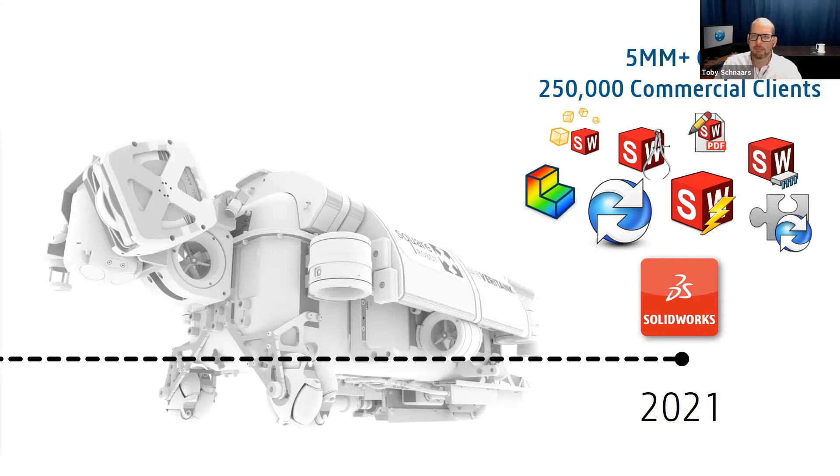But it turns out that SolidWorks is actually just one brand of many very strong brands available from Dassault Systèmes. Some of these other brands you may have heard of, things like CATIA, things like SIMULIA or ENOVIA. These are all different brands owned by Dassault Systèmes that are incredibly strong, have amazing teams of developers behind them, and have developed mature products available. But SolidWorks wasn't really touching any of these solutions - it was kind of in its own little world, not branching out and not taking advantage of these other solutions. And so to bring all these solutions together, the 3DEXPERIENCE was created.

3D experience is really a platform, an idea if you will, that becomes a very specific and useful tool when you and your team purchase it and start using it. But the idea is really to leverage technology and resources from all the brands that Dassault has access to, bringing them all together in one single interface. And that interface is known as the 3DEXPERIENCE platform.

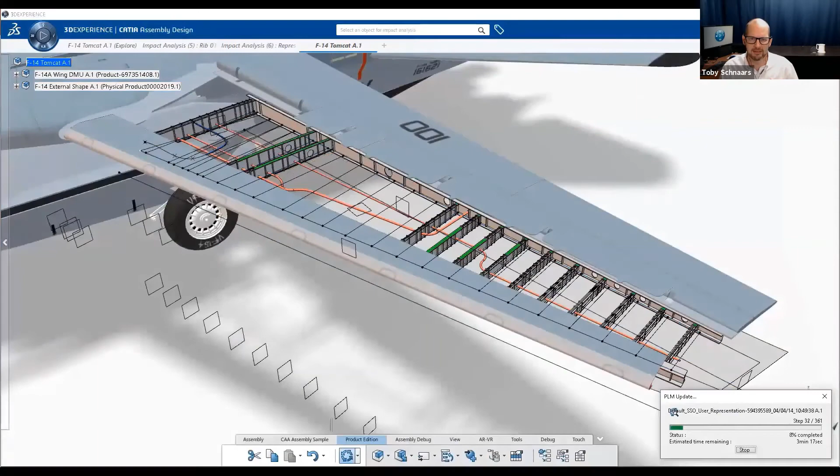So for example, CATIA - high-end 3D CAD modeling, super extensive libraries, super capable tools. CATIA in combination with Centric PLM would maybe let you do something like this: design an entire airplane, every single component on the airplane, design the fluid lines for the wings, design the electrical systems, all in one assembly, all in one environment. That's really leveraging the power of CATIA inside of a 3D experience environment.

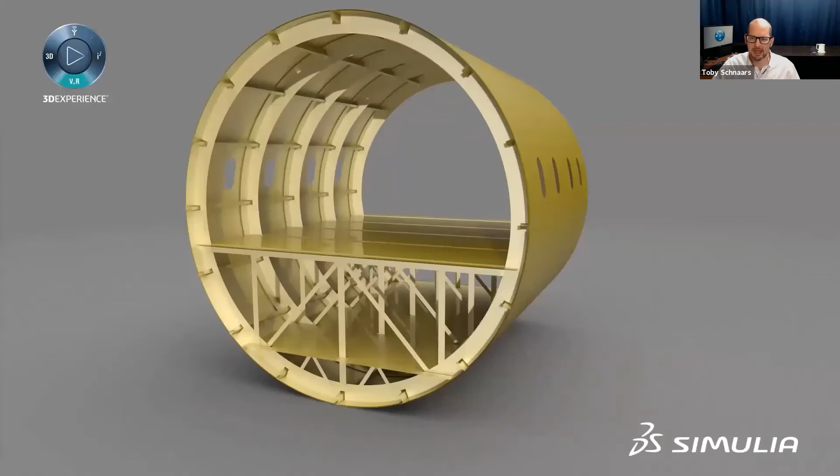Or maybe my favorite product, SolidWorks. What if we wanted to take SolidWorks and do some crazy nonlinear analysis on a SolidWorks assembly? Well, we could do that by taking the SolidWorks models and loading them into the incredibly capable SIMULIA tools, generating a study like this, a nonlinear study, where we could really see what's happening throughout the entire fuselage. This is an example of taking models that you've created in SolidWorks and then leveraging the 3D experience to get additional capabilities that you wouldn't find in SolidWorks or even inside SolidWorks Simulation Premium.

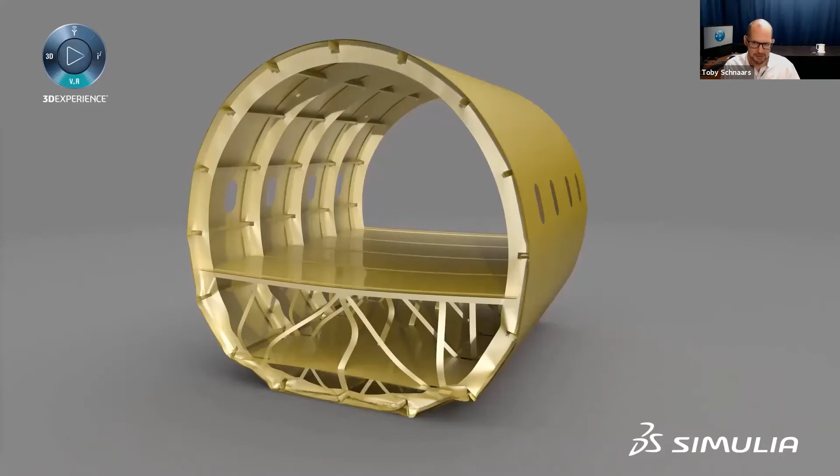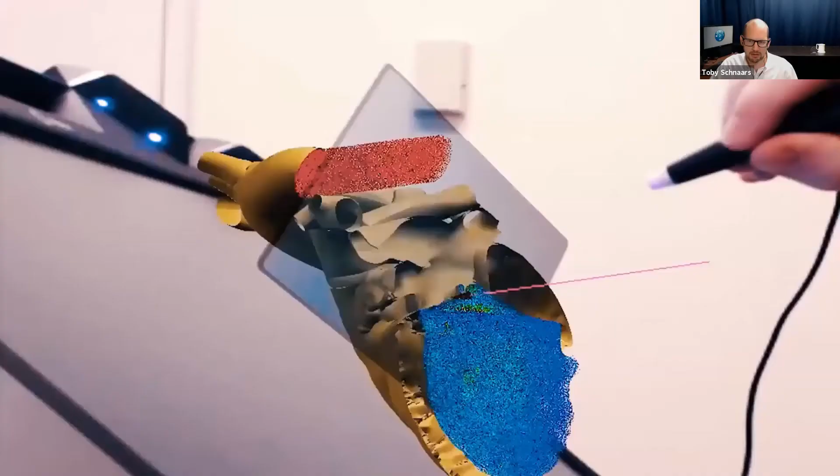Or maybe even something like a human organ, being able to hold a human heart in your hand and move it around and take a section view through it and see what's going on with the fluid flow inside of a human heart. These are tools and capabilities that are absolutely within our grasp.

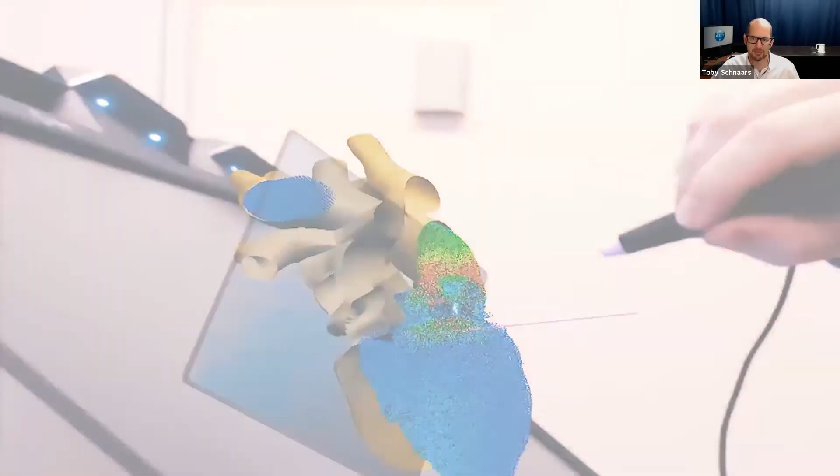We have these tools in other areas of the company. Why not bring them all together and put them into one single system that everyone can utilize? That's really the idea behind 3DEXPERIENCE. It's just that idea of creating a portal that the entire team can log into and leverage, utilizing technologies from different areas of Dassault.

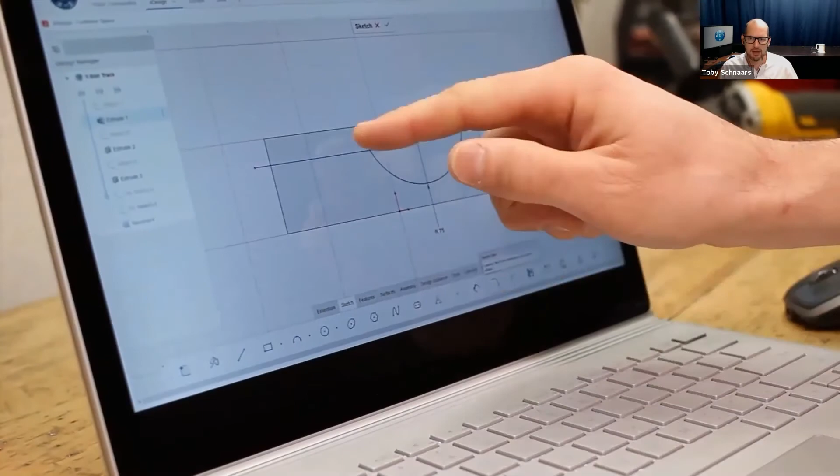One of the things I've always loved about Dassault is the 3D modeling we find in SolidWorks. We're seeing some of these modeling capabilities being moved over to 3DEXPERIENCE in the form of a true browser-based 3D CAD system. So here you can see I'm at my workbench, working on a touch screen computer, and I'm able to create sketch geometry and solid geometry. But this isn't a program I installed on my computer. This is actually all being done within a web browser.

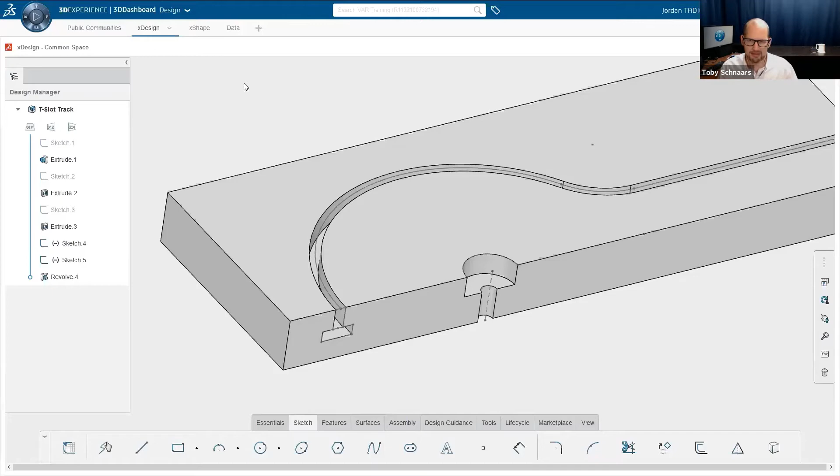So I don't have to install any software. And more importantly, because it's in the web browser, I could jump off of this computer, go upstairs, jump onto my tablet, and pick up right where I left off. All the heavy lifting is being done in the cloud, and very little is being done by that local device.

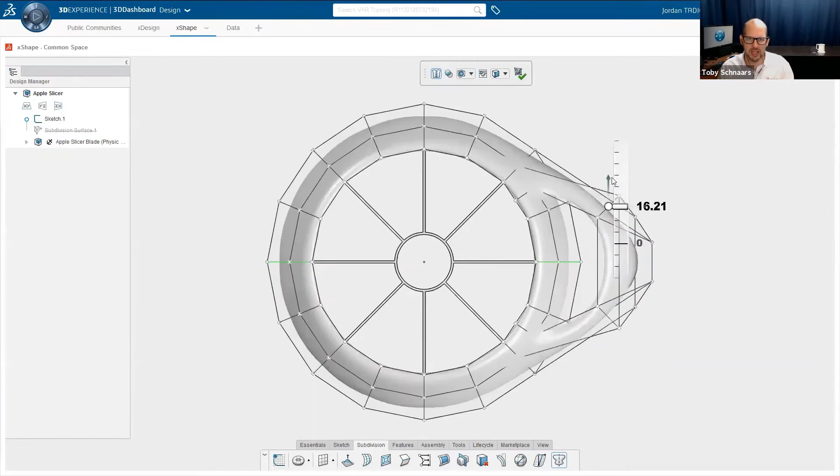And this capability doesn't only apply to what you'd traditionally find in mechanical engineering, machined parts, but it's also something we can do in a web browser on swoopy, lofty parts. This is a different browser-based tool called X-Shape. What X-Shape lets you do is create plastic, swoopy, lofty commercial products in just a few clicks. You saw that entire shape.

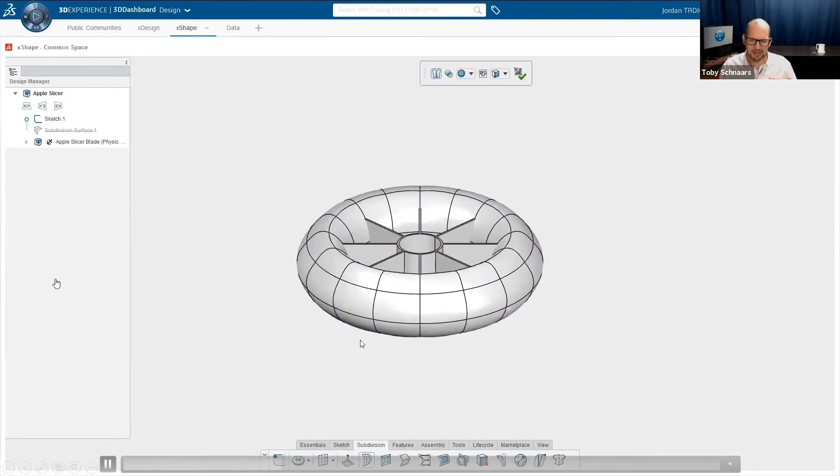It happened so fast, I could start it over and show you again. It started as a donut. Instead of starting with a sketch and revolving it, you just drop a donut out there. You're able to resize that donut, grab different nodes, push and pull, and ultimately create this shape.

Now, creating something like this in SolidWorks and ensuring you're maintaining continuity between the different faces, curvature continuity between the faces, would take hours and hours, maybe even days to come up with the final solution. But by leveraging 3DEXPERIENCE, we're able to utilize tools we never had access to, and create this geometry in just a matter of minutes.

And then maybe you could share that with the team, get some feedback, make a 3D print. You could then decide you want to make version 2, version 3, version 4, and finally come up with version 5, which is the final version.

Now, what do you do with it after you're done with version 5? Well, using our interconnectivity tools, you can just push that model right into SolidWorks. In fact, you could even export from X-Shape as a neutral file format, like a 3DXML or a STEP file. You could export right out of X-Shape, and then open that in SolidWorks.

And you could begin creating your parting lines, begin shelling, adding ribs, adding any internal components, and getting that design ready for manufacturing. Maybe have the whole thing, 5 different permutations, 3D CAD model created, manufacturing model created out of SolidWorks, top half, bottom half, parting lines created, mold design created in a day, instead of maybe taking weeks to go back and forth with the rest of the team and make those changes.

So that's really when you're looking for the benefit of 3DEXPERIENCE: it's that streamlined communication combined with tools we've never had access to, allowing you and your team to get your products from drawing board out the door and into market that much faster. That's really the core benefit we're all trying to achieve.

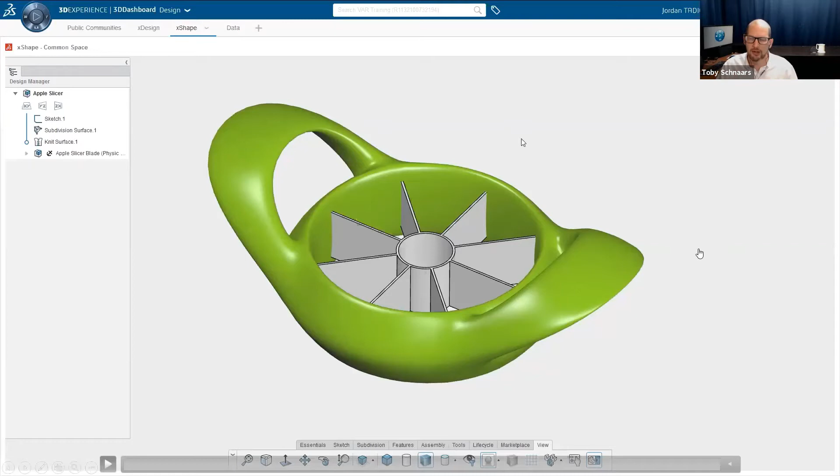Now, this tool, just like the previous tool I showed you called XDesign, runs entirely in a browser. This one is called X-Shape. It means you can jump from one device to another, log out of one session and log into another, and just pick up right where you left off. That's another huge benefit of this being browser-based technology.

Here we can see what that browser-based interface looks like. In this case, I can have files stored on the left in a file repository, like the Apple Slicer. This could be a file repository the entire team can access, and I can take those files and drag and drop them into the layout on the right, which is a 3D model viewer.

We can see that when we do that, anyone on the team who's been granted access can view the files in 3D. This means they can take measurements, make exploded views, and they don't have to have any special software loaded. This is all inside the browser.

So you could do this from the road, from your mobile device, your phone, a tablet, whatever it is, and provide feedback to the rest of the team. Imagine how beneficial it'll be when the project manager can look at a 3D CAD model, discover something wrong, and convey that back to the engineer all from the road—maybe some found time while in transit, maybe on an airplane.

But the tools available in 3DEXPERIENCE are not limited to CAD and engineering, and this is where we really start to shine when it comes to the differences between the SolidWorks solutions and what we offer in 3DEXPERIENCE. In fact, you could get a lot of benefit out of 3DEXPERIENCE without ever even touching the 3D modeling tools.

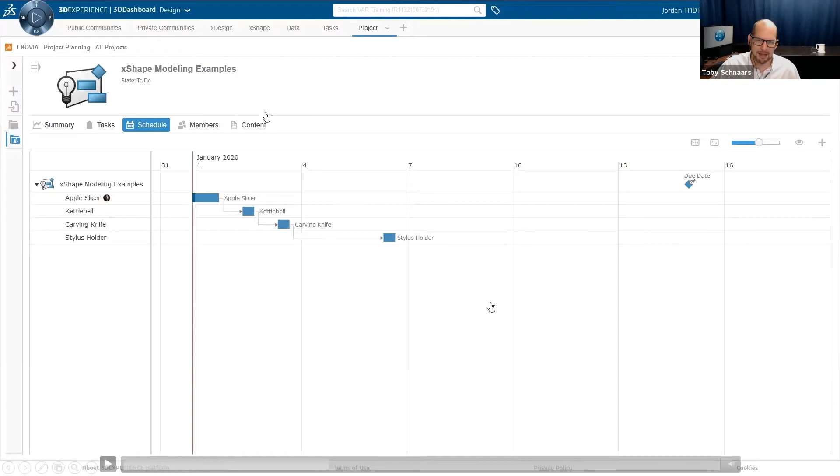So as we make adjustments, we can see that dependency caused the timeline to move forward a little bit. But it's not far enough that we're going to be beyond the due date, so we should be okay.

Now, of course, the items on this Gantt chart are linked to specific tasks we can assign to our team members. Each team member can be presented with a to-do, in-progress, and done task management suite, so that everyone on the team at any point can check in and see how people are doing.

Imagine if you were the project manager wanting to figure out whether your employee was done with that Apple Slicer. Just by logging into the collaborative tasks, you can see an overview of which tasks are open and which are done. This can be presented in a variety of ways, including charts and graphs—so if you prefer a pie chart showing how many tasks on your team are open, in progress, or done, you can absolutely do that in 3DEXPERIENCE.

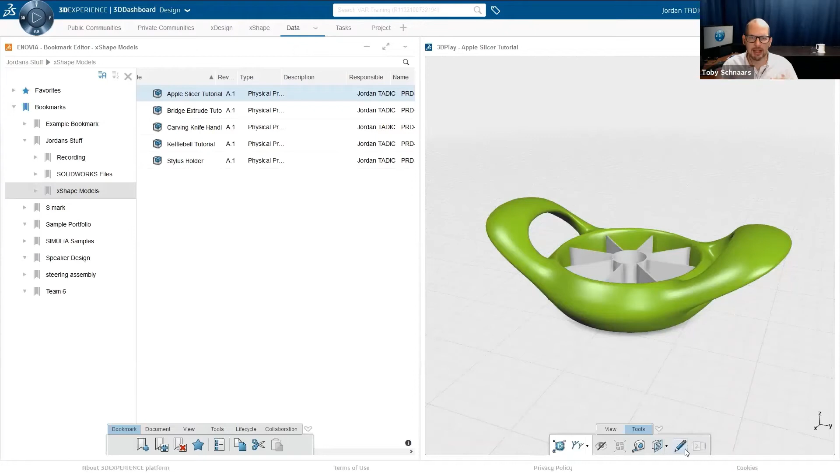Along the way, we're going to be able to tap into things like notifications. So when that task does move to done, the project manager, the coworkers, the other people on the team are going to get notifications. Nobody has to wait for somebody to send an email or say, hey, I'm done with that, you can take it next. You're just automatically going to get notifications when it's your turn to jump into the project.

I mentioned before that we can utilize this 3D viewer and anyone on the team can view it and provide feedback. Well, the easiest way to do that is just to create a markup and then share that markup with the rest of the team.

Now, one thing we like to do in 3DEXPERIENCE is ditch the idea of email, and instead we prefer to communicate on a message board. So you get the entire team that's involved with this project, or the entire team that does electrical work, or the entire team that really forms a community. It's up to you to decide what dictates or defines that community. But you get those people who all belong to the same community, who all have the same interest or the same goal, and you bring them together into one of these message boards.

That way you start to get away from the whole reply-all chain. You send an email to somebody, they reply to you and somebody else, now you're going to reply all to them. And before you know it, you've got 50 emails that have nothing to do with you. Instead, what you're able to do is post something on a message board and read the comments that pertain to that particular post. So you can right away see everyone who's got some input, some collaboration for that phase of the project.

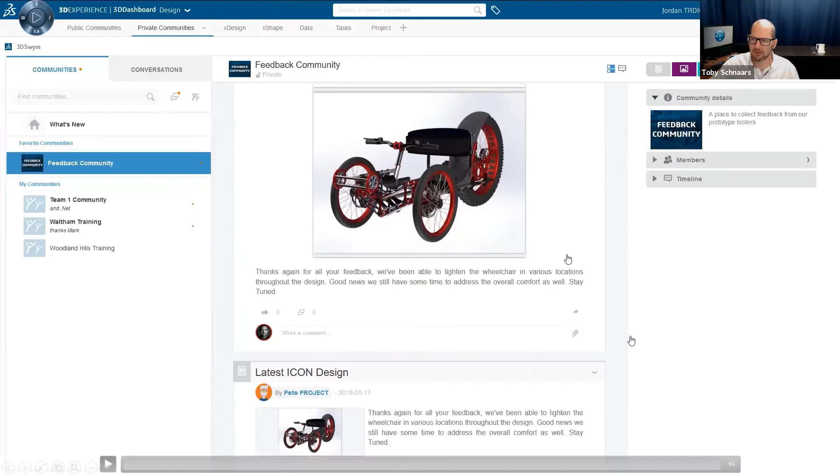So we can see that 3DEXPERIENCE lets us work with our 3D models, lets us create a 3D model and view it in a 3D viewer, lets everyone on the team have access to those tools. And I don't think it can be stated enough that those tools are going to be available from your laptop, but they're also going to be available from a mobile device like a tablet or even your mobile phone. That's just going to further streamline the process of getting the answers and the information you need and directing the project.

As far as the tangible benefits, what I would say is that 3DEXPERIENCE is cloud enabled, which means you're going to have lighter hardware and a more simplified deployment. So cloud enabled means that everything being taken care of is taken care of up in the cloud. It's web authenticated. You don't have to worry about setting up those servers or anything like that.

The lighter hardware means not only for the server side, but also for the end user side, you're able to do your 3D CAD in the browser. There's no special workstation that's required. You're just doing all that CAD in the browser, and then you're leveraging the cloud to do the computing.

As far as simplified deploy goes, when a new update comes out, if you do happen to have any plugins for your local software, like for Solidworks, it's a one-click update. Otherwise, you just log out one day, log in the next day, and the updates have been pushed. Right away, you're ready to start using the latest and greatest functionality in 3DEXPERIENCE.

So what is 3DEXPERIENCE? It's a way of taking all of this technology, all of these resources from throughout Dassault, and combining it together into one single environment that you and your entire team can log into to leverage, to do product development, to do sales development, whatever your task is at your company. There's going to be tools inside of 3DEXPERIENCE that are going to help you. And the benefit is that this puts everybody on the team in one single environment, so now you're able to leverage data from other departments.

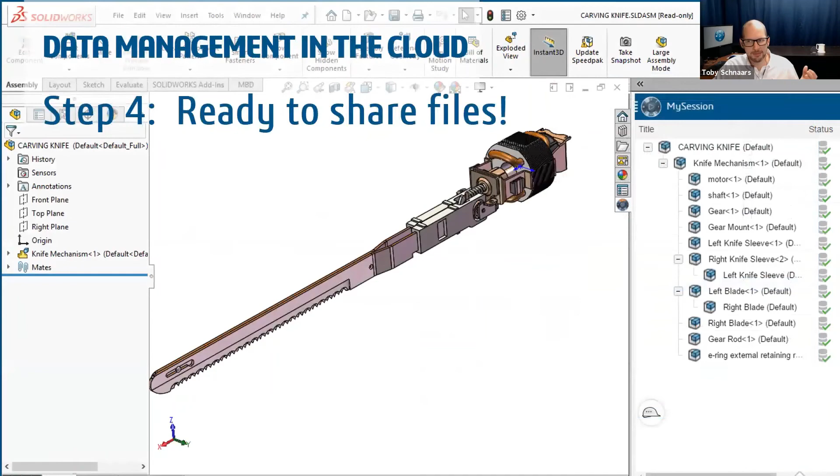You're going to find that your engineers in Pennsylvania are going to be able to share their files with the engineers in Ohio, who will be able to share their files with the engineers in California and all throughout the country, or even all throughout the world. Now, the thing that I think really makes this solution appealing, especially to your engineers, is that it all works right within SolidWorks. So when you propose this to your engineering team, you're not going to be showing them some brand new tool that they've never seen before.

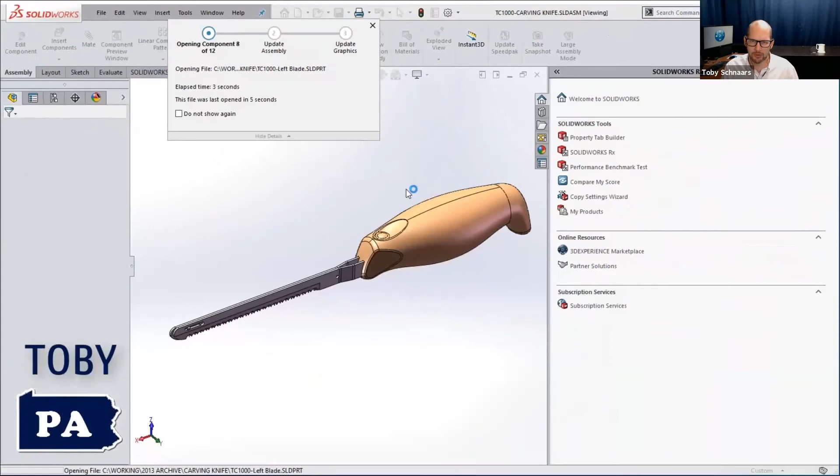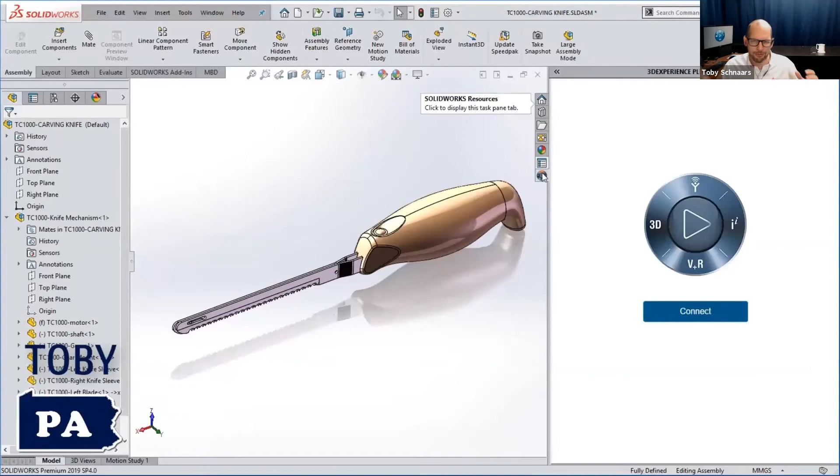If you wanted to get started taking files and adding them to the file repository, the first thing you would do is you would just go to open files the way that you've always done. So here we are inside of SolidWorks using the files that we're already used to, the tools we're already used to, and we're just going to turn on an add-in inside of SolidWorks, which means that we're never going to leave this environment. We're going to maintain that continuity with our old friend SolidWorks that we're used to. We're not going to be throwing anything new at the engineers that will throw them off, and it's going to make it very easy for them to adapt to and adopt this new solution.

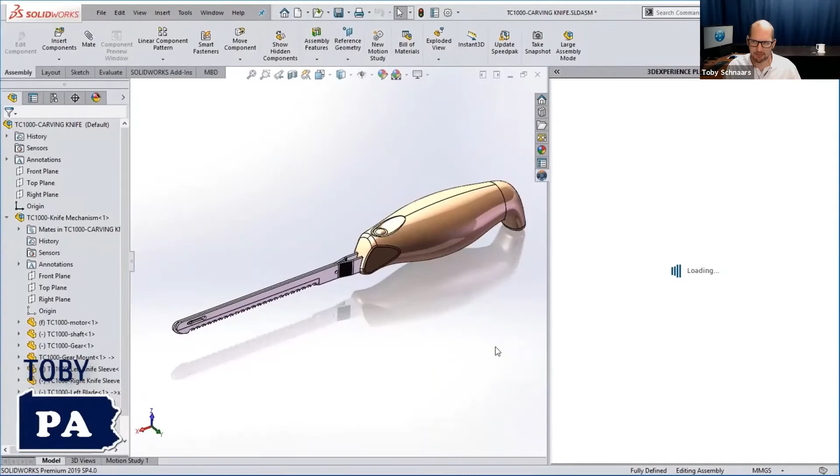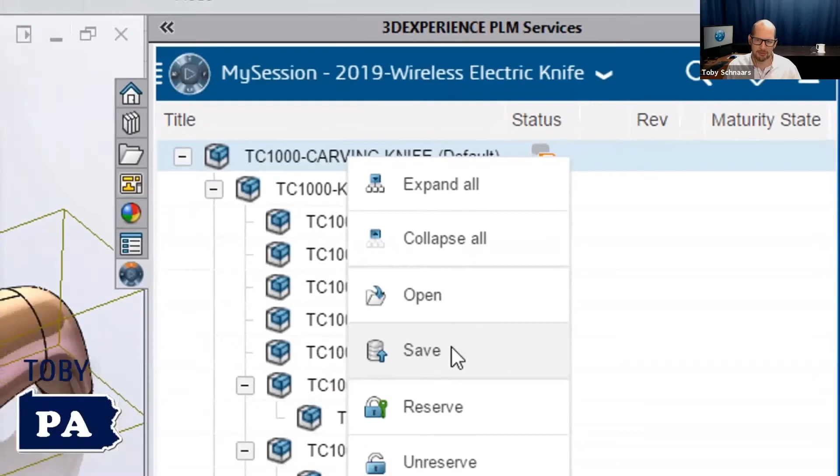Once those engineers get in and they're ready to add files to this repository, all they really need to do is a right mouse button and a save. That's what we're showing here. The assembly is open, and the task pane is over on the right in SolidWorks, which the engineers are already used to seeing. All they need to do is go into that task pane and do a right mouse button on that file and choose save. And because 3DEXPERIENCE understands the interrelationship between SolidWorks files, it's going to scoop up all of the parts, all of the sub-assemblies, and add them into that central file repository.

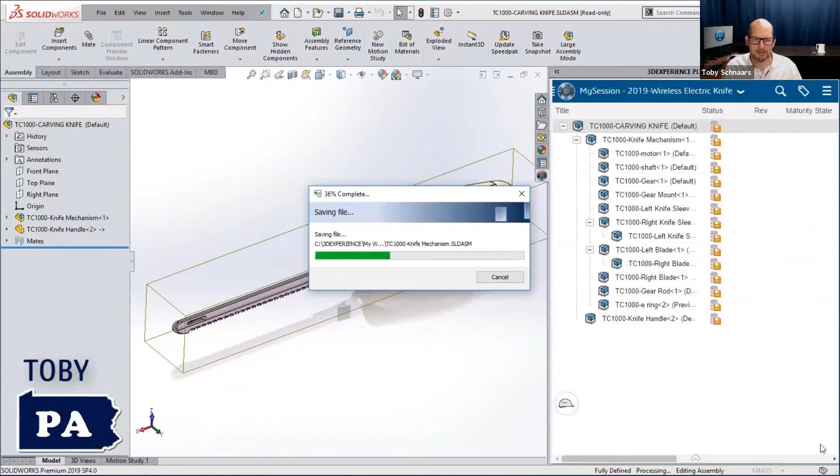Ultimately what this means is that everyone on your team is now going to be able to access these files. Maybe another engineer is going to need to take these files and make more changes in SolidWorks, but maybe it's just a project manager, or maybe even somebody in purchasing who wants to look through the assembly structure and use the information from that assembly structure to order some of the off-the-shelf parts. This is the benefit of 3DEXPERIENCE: everybody's able to access this data from one single location. Everybody goes to the same spot. Everybody logs in the same way.

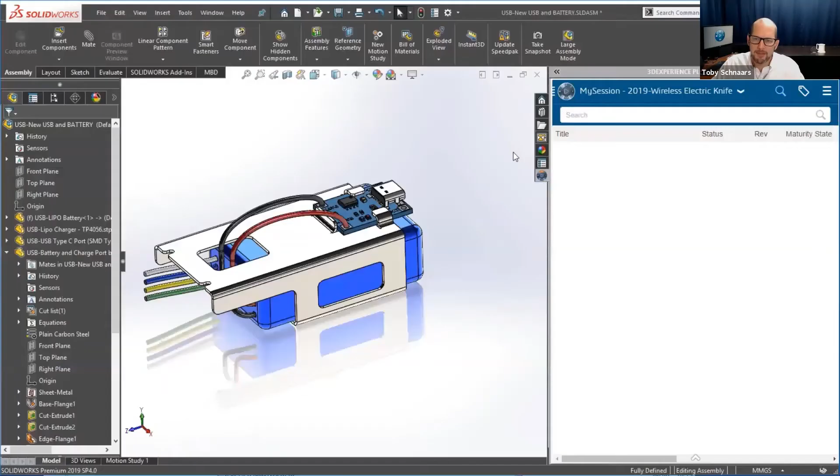So I hope that helps to illustrate this idea of data management in the cloud. We've seen a lot of customers all throughout North America, all throughout the world really, who have adopted this solution and have been really happy with it. It's a great way to get your team up and running, especially if currently your team doesn't have any data management as part of the solution for SolidWorks.

This is just a great way to get them up and running, get them sharing files, and give them new tools they didn't have before, like the ability to create revision A, revision B, revision C, and at any point substitute one in for the other. This gives them the ability to have the team in Pennsylvania working on one end of the assembly, the team in Ohio simultaneously working on another end of the assembly, and then both teams just choosing an update button and updating all the files to the latest build.

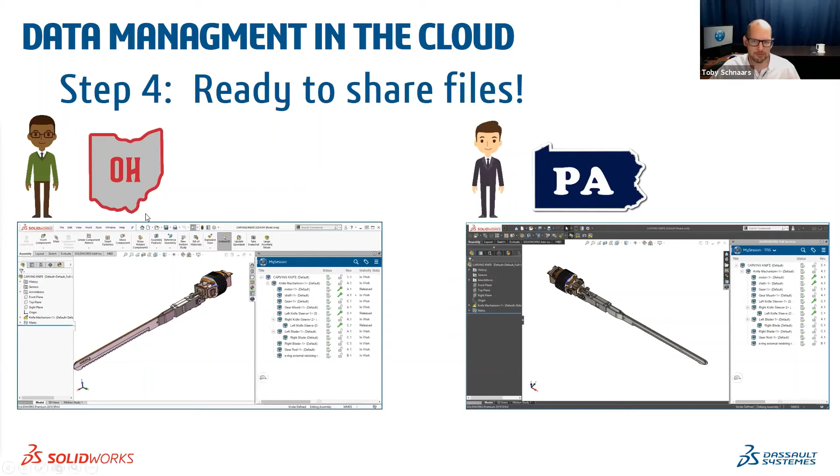So lots of good things to say about the data management solution for SolidWorks users, and like I said, we've gotten a lot of great feedback regarding that solution. So the final thing I'd like to talk to you about today is how this all comes together for the rest of the team, because we're taking these solutions that exist in the Dassault ecosystem and bringing them all together so that everyone on the team can benefit. One of the first ways you'll witness that is in our foundational role in 3DEXPERIENCE, our foundational set of tools, which is called Collaborative Business Innovator.

I know I'm going to sound like a broken record here, but this addresses a lot of the same challenges companies are running into these days. You've got a team of users spread out geographically, using different devices. How do you get those users to communicate and collaborate?

First, you have to decide how to get them all onto the same network, maybe through VPN or some other remote access. Or instead, you're using existing tools, but everybody on the team is using a different set. Maybe one user is using Google tools, one is using Dropbox, one is using Microsoft tools, and it doesn't make for a smooth flow of data or a smooth collaborative experience.

Maybe some users are still hoarding their data, holding it on local hard drives. I'm laughing because I'm sitting here looking at a local hard drive right here at my desk. But maybe you've got users doing that, holding their data locally.

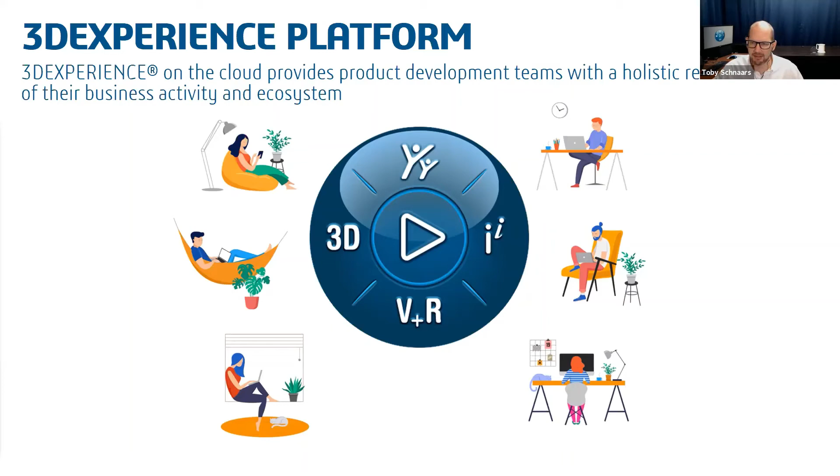Those tools are found in the Collaborative Business Innovator suite of tools. The first of these may seem rudimentary, but it's important to note that each user can set up their environment a little differently.

But maybe somebody else on your team is doing business management, and their front page is going to look a little different—they'll see all the KPIs, all the business quotas. Maybe somebody else is a marketing person, so the front page of their 3DEXPERIENCE will have a calendar with all the upcoming events. Whatever your job is, you have the ability to customize your layout to match it.

Since I'm a SolidWorks user, the second tab on my environment holds my SolidWorks designs. This is where I can establish a repository for 3D CAD models, and I can either keep this only in the cloud, or sync it to my desktop.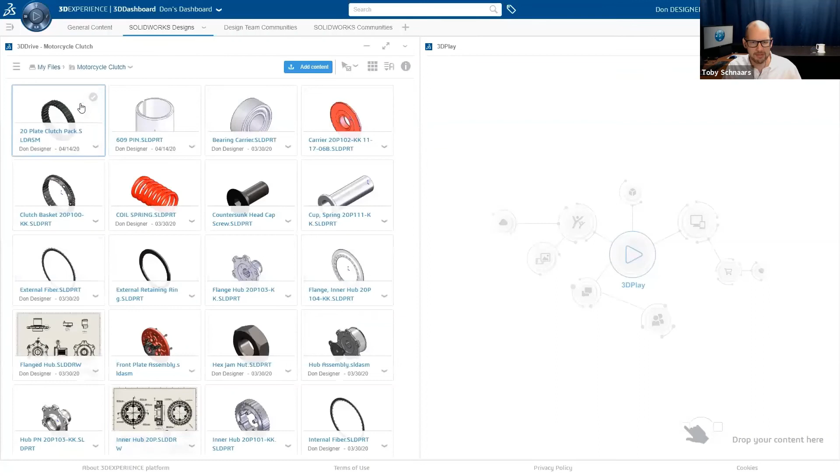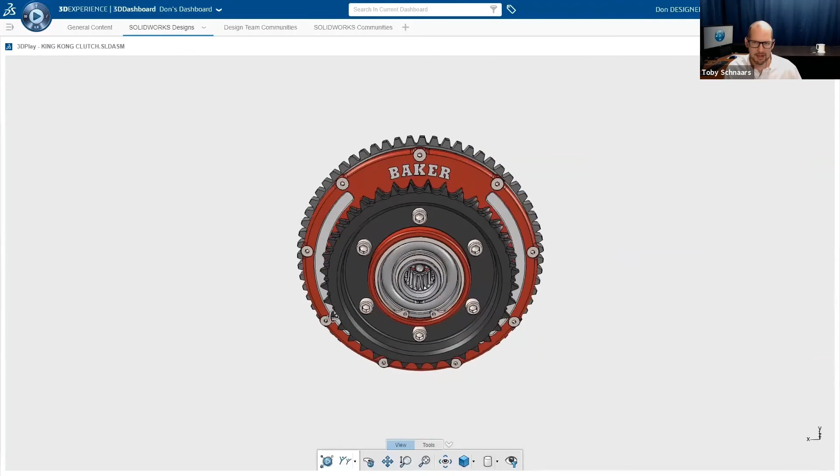So we took a look at something like this earlier, but you can see how nice it is for not only myself, but everyone on the team, managers, product managers, engineers, marketing people, purchasing people, everyone on the team can get in here, can view these files in 3D, can view these files in 2D, can mark up these files. This 3D Play viewer is a browser-based viewer. You don't have to install anything. Anyone on the team who has access to that folder can get in here and view these files in 3D. They can access some of the great tools we've got, like the section view tool.

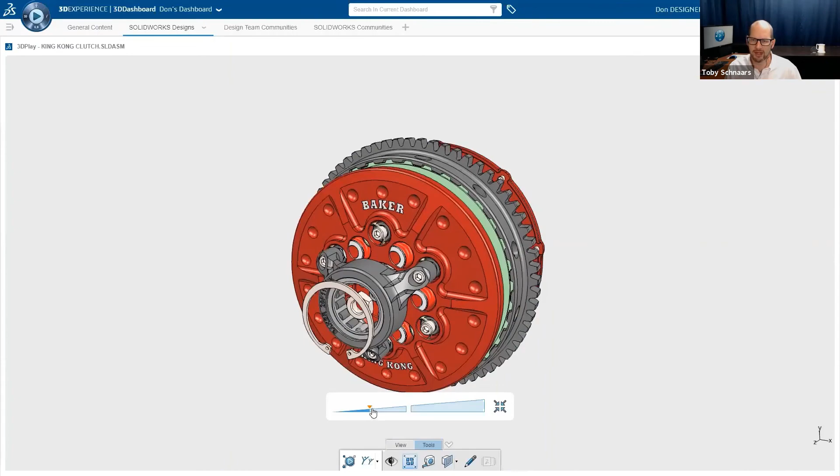So you could go through here and look and see, like, oh, it looks like there's a problem there. You're still using that old bolt. We've got to make sure we order the new bolt. Or they could even perform an explode view of this assembly to really understand what's going on inside of it. This would be great for a design review meeting, and it doesn't require any special hardware because it's all within the browser.

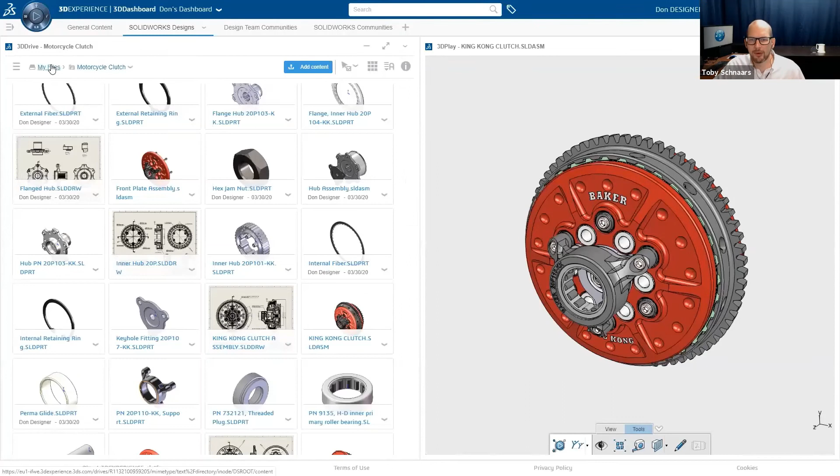This is just one of the many tools that all users will have access to. And of course, their access to the folder would be dependent on access granted. We'd have to invite them into that folder. But you're going to find that this online file repository is very similar in terms of capability to some of the other tools out there. So maybe you're currently paying a subscription to another tool that lets you do file and folder sharing. Well, once you get on 3DEXPERIENCE, you're not even going to need that solution anymore. You'll have everything you need right here inside of 3DEXPERIENCE.

For example, file syncing to your local directory. That's something else we can absolutely do here in 3DEXPERIENCE. So now that we've created that folder for differential, we could go into that folder and just drag and drop or copy and paste files from our local drive. What's this going to do for us? Well, it's going to give us access to this information on the 3DEXPERIENCE platform, which means it's going to give our entire team access to this information.

So we can sync our files between our local drive and 3DEXPERIENCE. Once we do that sync, we're going to be able to view those files. And of course, everyone on the team is going to be able to view those files.

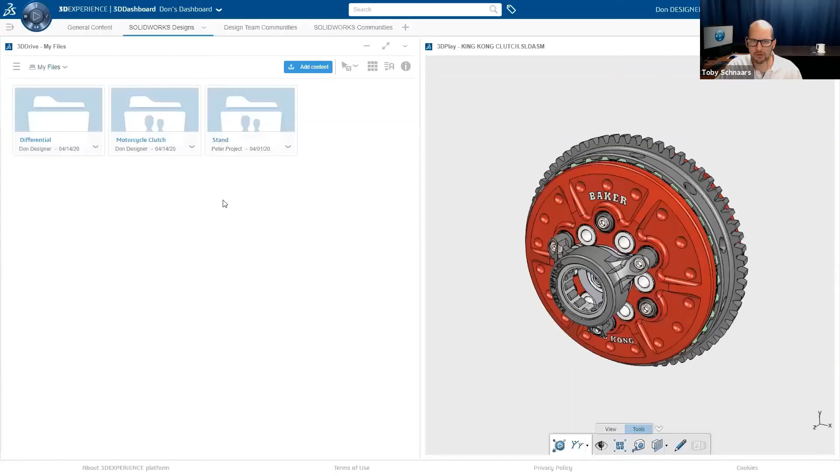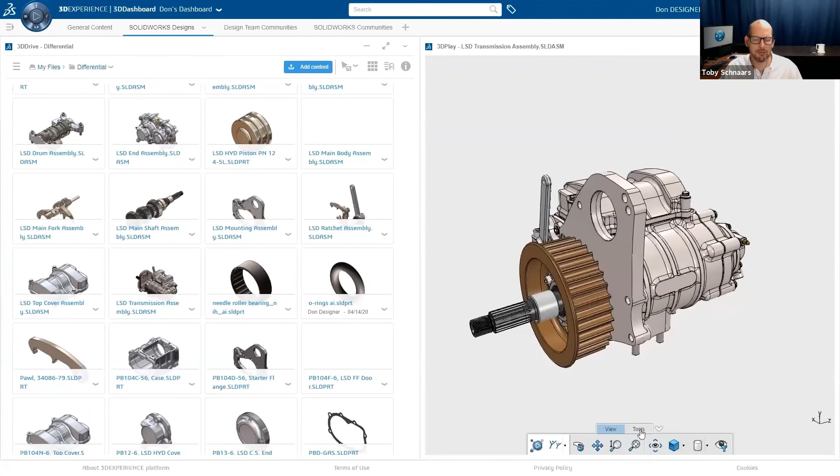We can also see that within 3DEXPERIENCE, we have the ability to share these files. So you're not just limited to you and your team accessing these files. If you needed to, for example, send it out to a contractor, you have the ability to share either just one single file or maybe even the entire folder out to that contractor. So just so many great capabilities to get rid of existing solutions you have, to kind of bring it all together in one spot and give you all the tools you need in one single solution.

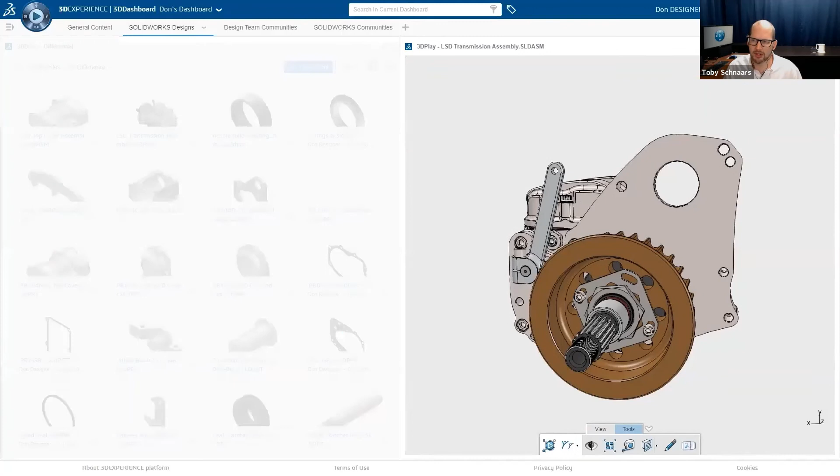When it comes to this basic suite of tools, the collaborative designer for SolidWorks, I'd be remiss if I didn't talk about the idea of marking up your designs. And I know I've talked about this a little bit already, but it definitely bears repeating. The ability to allow anyone on the team to get in here and mark up the designs. There's a lot of different ways you can mark up these designs. You can take measurements, create annotations, drag and drop, use a stylus, whatever it is, you can create these markups and then share these markups with the rest of the team.

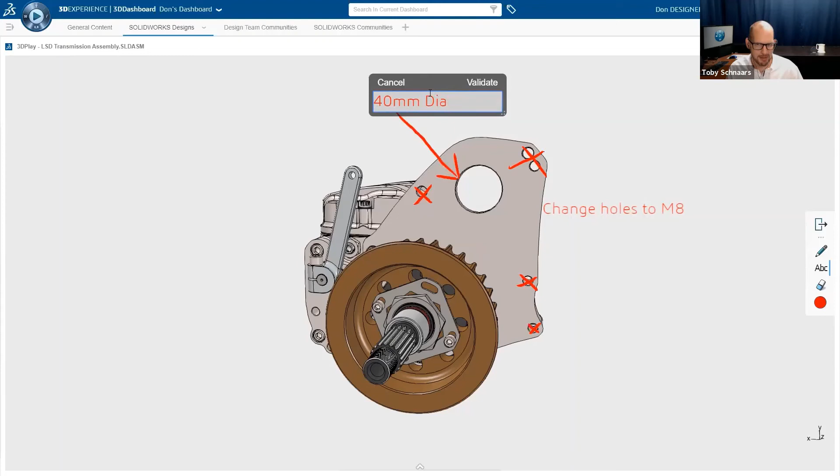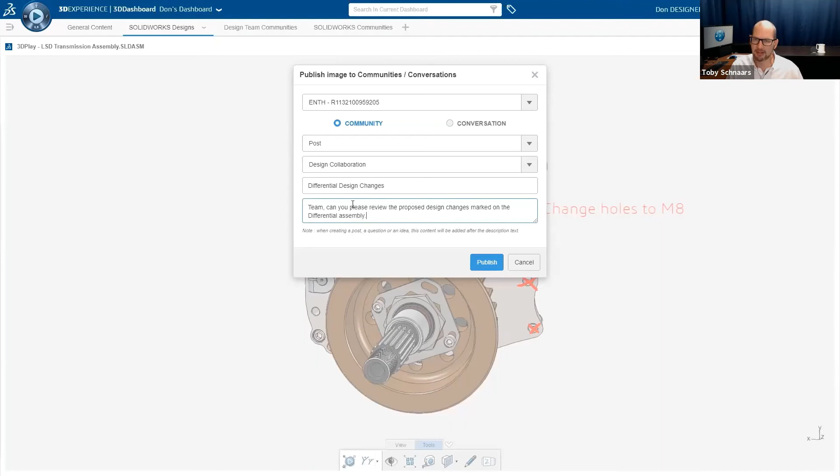And the way that we typically share these markups is not through an email, but instead through a message board. I know I talked about this a little bit earlier, but I think it's an important concept not to overlook. A lot of times people say, oh, who cares, it's just a message board. Well, it just saves you so much time trying to track down messages when you can see everybody's feedback in one place. It's definitely something we use at Dassault almost exclusively. I hardly ever email with my internal team anymore. It's almost entirely done on 3DEXPERIENCE. And so now we can see that information has been pushed, not just to a screen capture, but actually pushed to what we call a community, a message board.

When we're examining these message boards, we'll receive information in real time in the form of notifications. We can see a lot of different messages on this board, and how different people are contributing to our design processes. We can break these up to have different message boards pertain to different projects. Ultimately, we receive these notifications - Debbie mentioned something about my design, and maybe Peter mentioned something about my design as well.

Let's take a look and see what their feedback is. Again, the point here is that we're able to see this feedback from everybody all at once. We don't have to sort through a bunch of different messages.

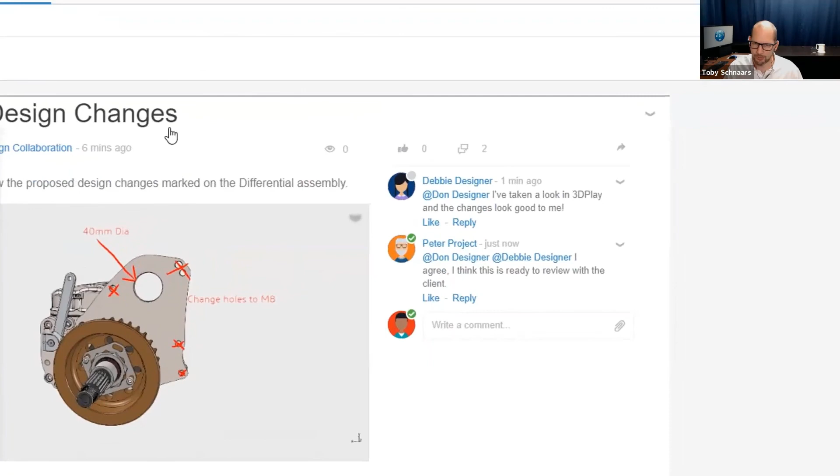The Collaborative Business Innovator, like I said, is really just an overview of the core set of tools that everybody on your team is going to be able to utilize. These tools give you access to the fundamental tools you find in 3DEXPERIENCE - the fundamental collaboration, sharing, and communication tools. Everybody's going to have these.

Even if you were just to purchase this suite, just accessing this very first suite of tools, you would find yourself in a great position to get rid of some of the other solutions you're currently using, get everybody onto the same page, and create a central location where everyone can communicate and share ideas. And of course, give your team new tools to view models in 3D, mark them up, and keep communication flowing so projects aren't held up overnight or over the weekend just because somebody couldn't get to their computer. When you can access it from anywhere, it really opens up the doors of communication and allows projects to keep moving forward.

And I think that's actually right about where I'm finishing up here. I hope that in this presentation you learned what 3DEXPERIENCE is.

The 3DEXPERIENCE is a web portal, a unified solution where Dassault is pulling from all the different brands they have access to - pulling resources, developers, technology - and bringing it all together in one spot where all these tools can understand and work together with one another. You're able to leverage data from one tool and utilize it in another, and it ultimately works towards the goal of giving you and your team more options for collaboration, communication, engineering, and productivity. That is what the 3DEXPERIENCE is.